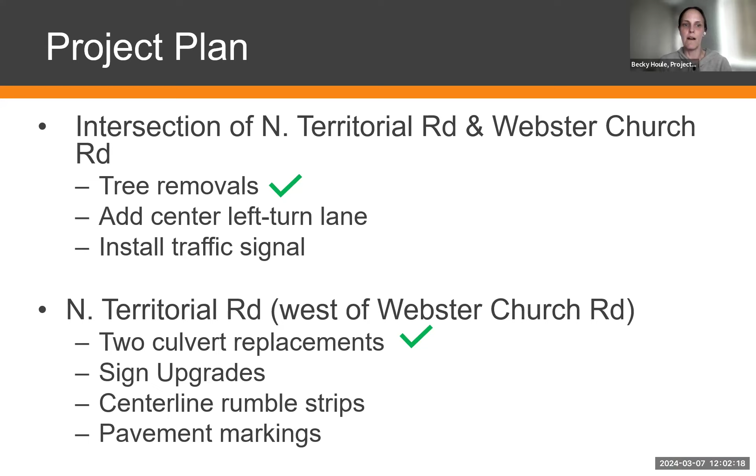We've already removed the trees for the intersection work that we're going to be doing, and now we're going to be installing the center left turn lanes and a traffic signal. And then west of Webster Church, we've already replaced the two culverts, and we're going to be upgrading signs, installing center line rumble strips, and putting down new pavement markings.

So we're doing this project to improve the safety and operation of the intersection and the North Territorial corridor. We've had concerns about the safety of this area, so we wanted to install the center left turn lanes and the signal.

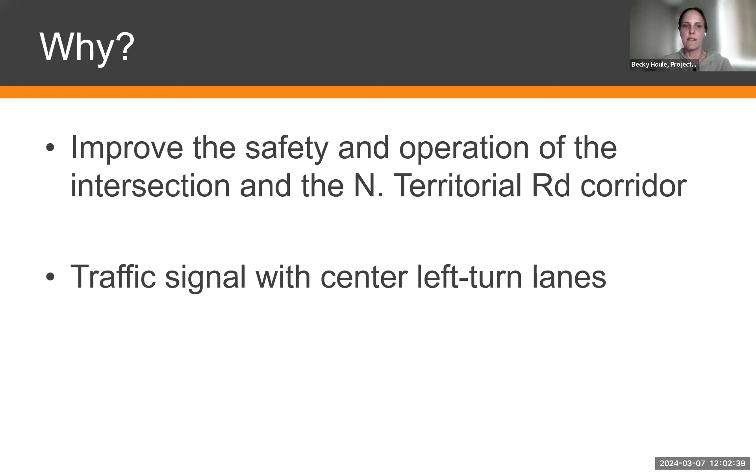So this $1.4 million project is being funded through a federal safety fund, along with additional federal funds and the Michigan Transportation Funds.

We plan on widening the road and installing center left turn lanes and a traffic signal, so it will look similar to this example shown on this slide.

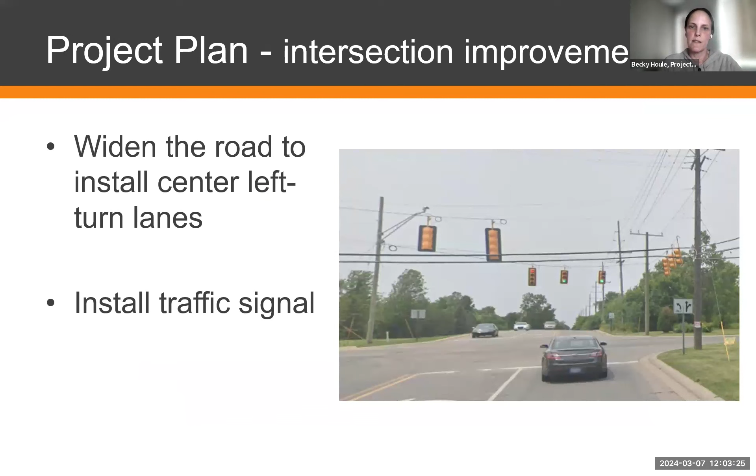We're also going to be installing centerline rumble strips, refreshing the pavement markings, and upgrading the signs from Mast to Webster Church. We're also going to be adding additional signs around the curves at Donovan, so it'll look similar to this picture shown on this slide.

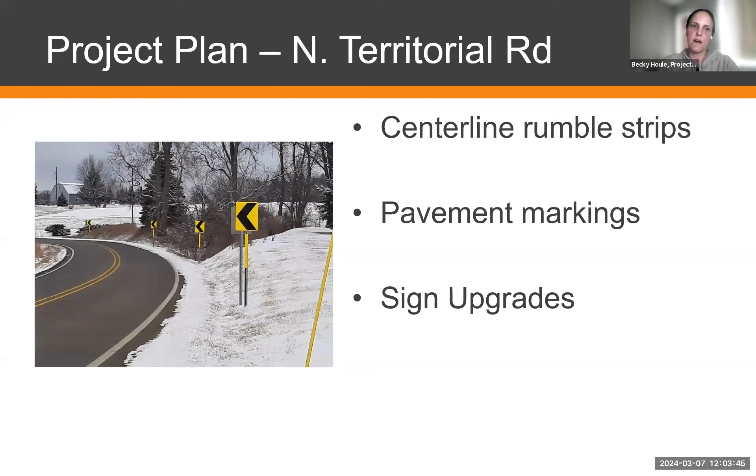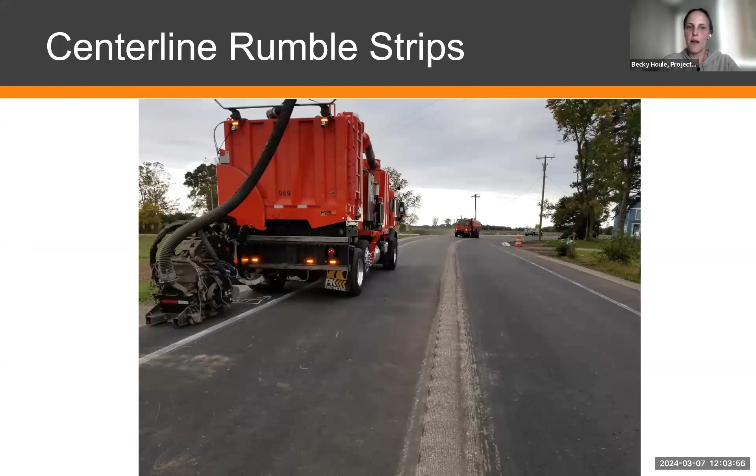This here is an example of rumble strips that we installed a couple years ago down on a project in York Township.

Now I'm going to go over the schedule and the traffic impacts. So we have already completed all the tree removals for the intersection and replaced the culverts. We're expecting the intersection work to begin mid-April, with the final project completion expected at the end of June. However, the intersection will be open prior to the final completion of the project.

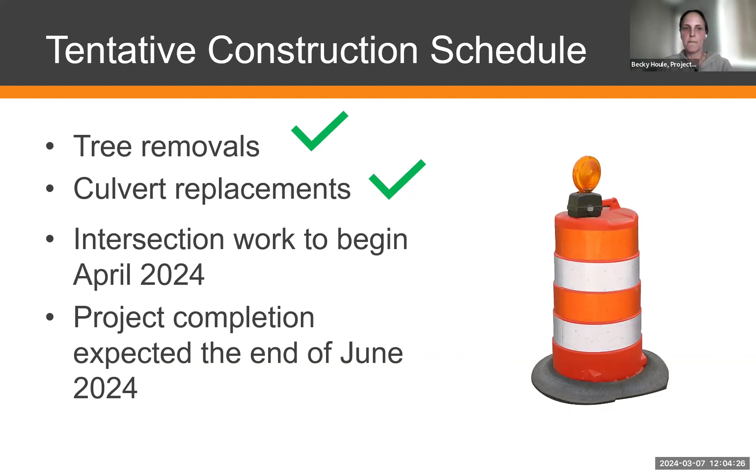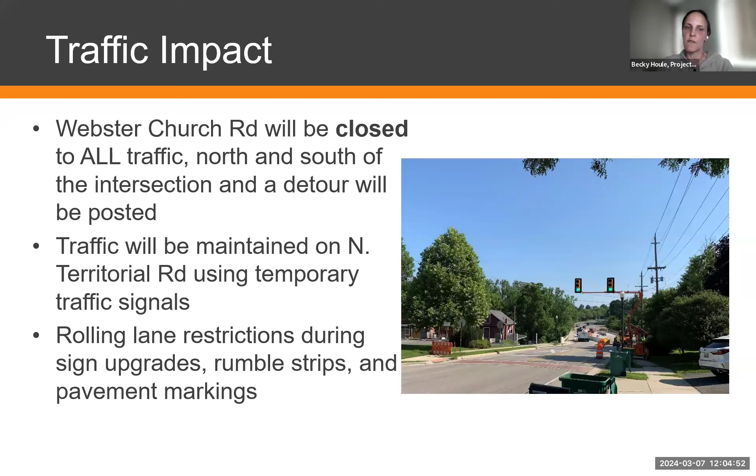There will be an impact to traffic. We are closing Webster Church Road north and south of the intersection. It'll be closed to all traffic, and a detour will be posted. We will be maintaining a single lane on North Territorial using temporary traffic signals. And then when we're doing the sign upgrades, the rumble strips, and the pavement markings, we'll be using a rolling lane restriction with flaggers as needed.

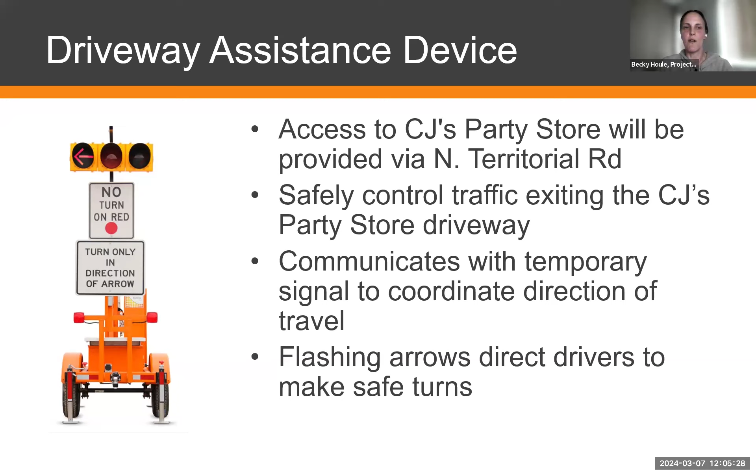As mentioned, we will be having a detour on Webster Church Road, so please do not try to drive around the barricades. We have been in contact with emergency services and Dexter Schools Transportation, so they are aware of this closure, and they will reroute as necessary.

This is the detour. As you can see, we're using Joy, Mast, Walsh, Merrill, and Valentine. We are aware that not everybody follows the posted detour, so we are going to keep in contact with our area foreman.

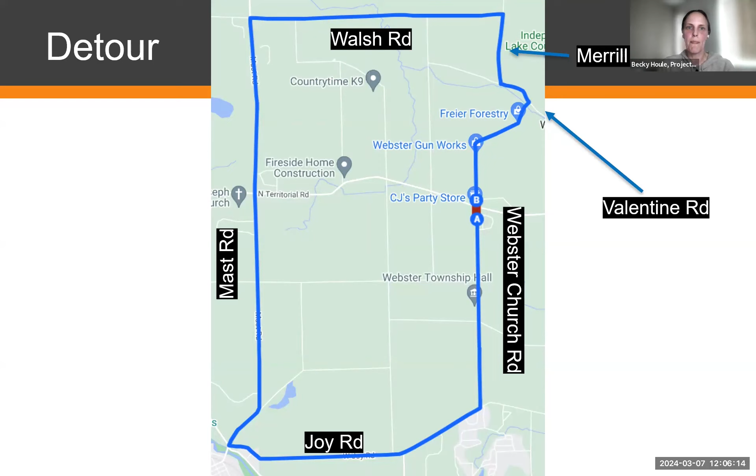And that is pretty much the gist of it, so I'll leave it back to you, Emma.

Hey, Emma. Yeah, I do have something, and actually it's just a nice segue. So I'm Aaron Berkholz. I'm the Assistant Director of Engineering here at the Road Commission.

As Emma touched on, the opportunity we provide to the public to subscribe for updates, there are other projects in this area that you might want to be aware of and that you may want to subscribe to. Because in addition to the work that we're going to undertake at North Territorial and Webster Church, we also have an ongoing project at North Territorial and Dexter Town Hall.

We just had a public information meeting for that project recently, and that project just started. But that involved the closure of that intersection. So again, the intersection at North Territorial and Dexter Town Hall is currently closed because of the nature of the work that's going on there.

For those traveling the North Territorial Road corridor and continuing further west, you'll want to know about not only this project at Webster Church, but the next project down the line at Town Hall Road. The other project to be mindful of is that as we're completing the work here at North Territorial and Webster Church, we'll also be resurfacing North Territorial Road from Webster Church Road east toward Whitmore Lake Road and US 23. We're working with our contractor partners to segue as smoothly as we can from this intersection project into that asphalt resurfacing project.

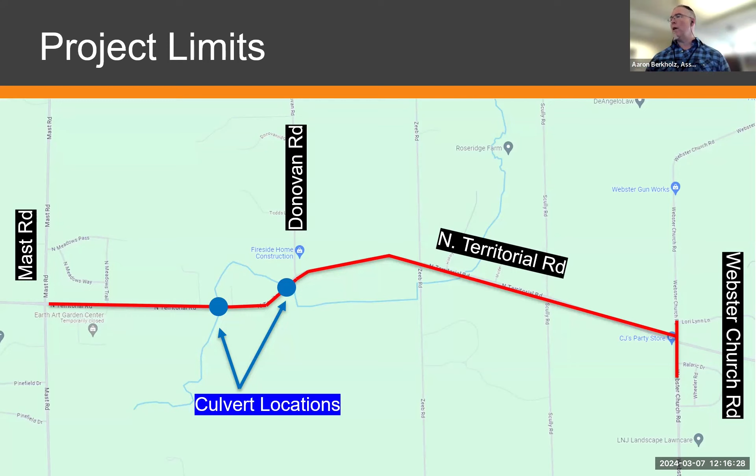Regarding the development just to the west of that intersection, in the southwest corner, I don't know a lot of specifics. I'd only venture a guess that there will be some road improvements at the entrances to that subdivision. I noticed they just started land balancing there recently, so I'm not sure of the schedule. But if you'd share your contact information, we'd be happy to follow up as we learn more.

I'm getting some more questions in the chat too, Becky.

APG asks whether the turn lane and signal was based on safety concerns or actual incidents that happened. I guess they want to know why we are deciding on a signal there.

We've had this intersection on our monitoring list for many years, and it meets the warrants required for a traffic signal. That means traffic coming in from all directions is high enough, and there have been enough correctable crashes at this location to install the traffic signal.

Sue asked again where the road closed signs will actually be placed, i.e. on Merrill Road.

For the road closed signs, there will be one on Webster Church, like a barricade with road closed ahead. That would be off of Valentine, so people driving along Valentine will know not to turn onto Webster Church because the road is closed. On Merrill Road, it'll just have the detour signs.